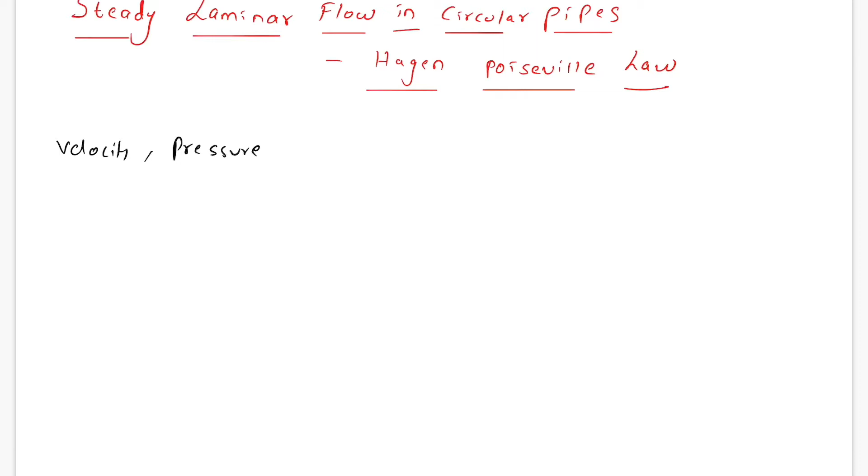Now we'll be dealing with the next topic in your syllabus, the Hagen-Poiseuille equation. This is probably the most important topic in this unit - steady laminar flow in circular pipes, also called Hagen-Poiseuille law. We deal with deriving the relations for velocity and pressure difference for flow. Both these relations will be dealt with here.

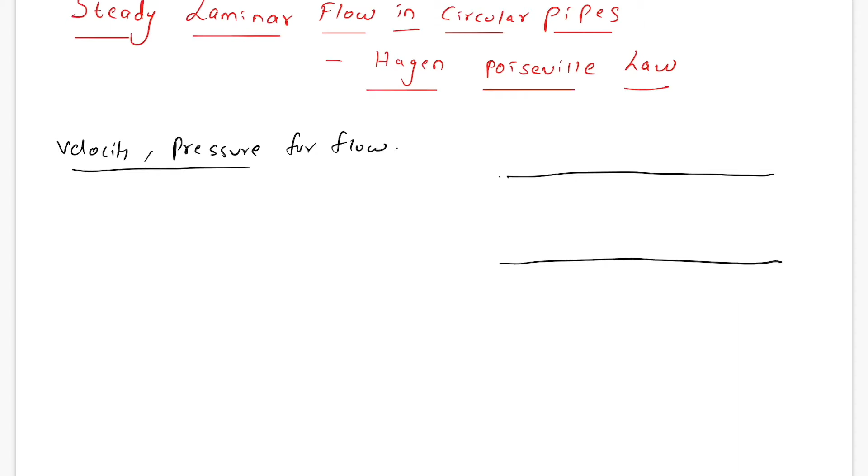Now let us consider a pipe of certain diameter d. In this pipe, let us consider 2 points, point number 1 and point number 2. These 2 points will be on the same horizontal line. There will be flow inside the pipe, and the average velocity of the pipe will be taken as V.

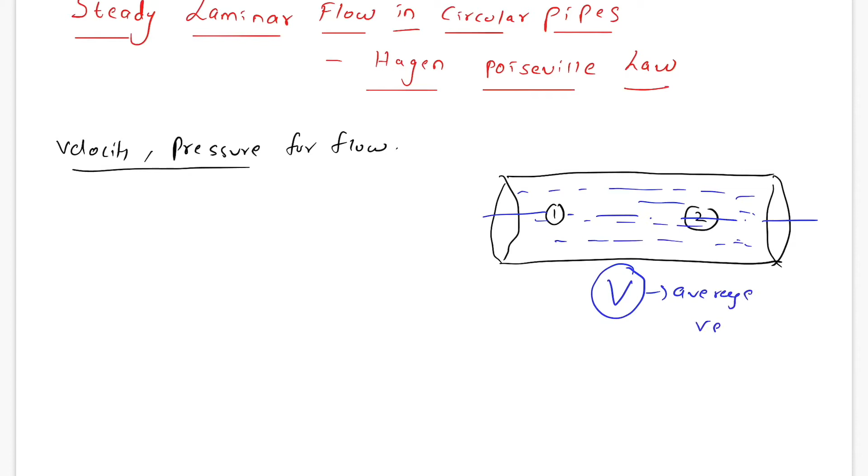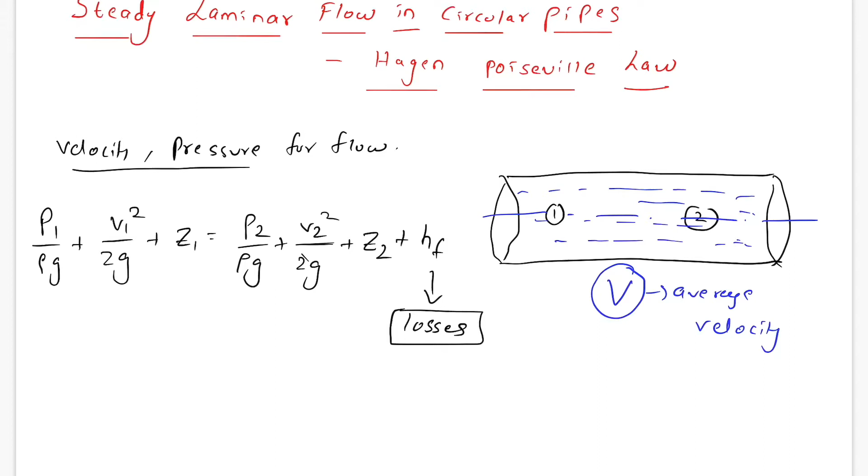Now the next thing we'll do is apply Bernoulli's equation to this particular pipe flow. Considering these 2 points, it will become P1 by rho g plus V1 square by 2g plus Z1 equals P2 by rho g plus V2 square by 2g plus Z2 plus HF. Why HF? Because there are losses inside the pipe - that is what this whole unit is about. We are considering losses, but laminar losses, not higher losses like turbulent flow.

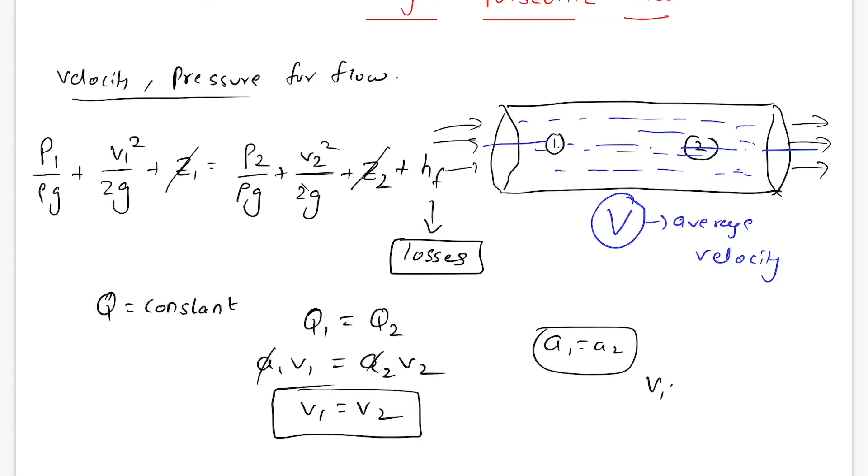Since these points are on the same horizontal line, Z1 and Z2 are the same, so they get cancelled. Also, discharge through the pipe is constant since there's no change in area - whatever flow comes in here comes out there. So Q is constant, meaning discharge at point 1 equals discharge at point 2: A1V1 equals A2V2. Since there's no change in area between point 1 and point 2, A1 equals A2, so A1 A2 cancel and V1 equals V2 - the velocity is the same at both points. We'll take V1 equals V2 equals V.

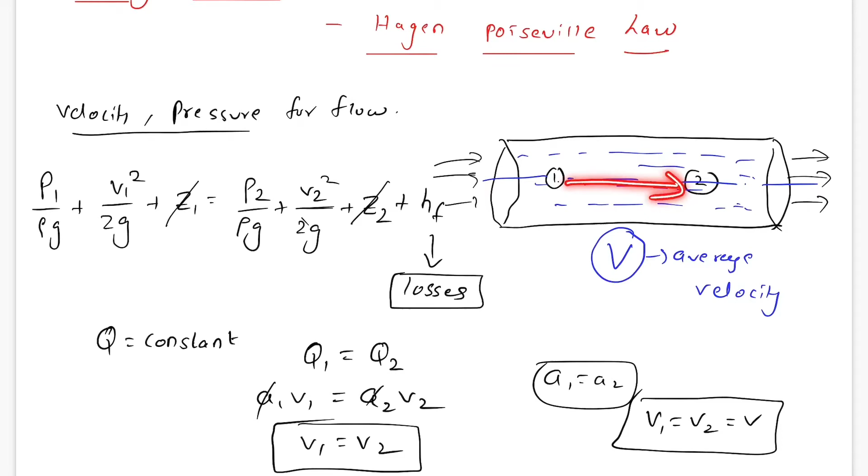Why do we take V1 equals V2 equals V? To simplify the calculation process, since we're considering 2 points, if both are constant, why not take a singular value? So in Bernoulli's equation, V1 equals V2 cuts off, and it becomes: P1 minus P2 by rho g equals HF. That is, the head loss equals the change in pressure, or decrease in pressure, divided by the specific weight of the fluid. We've already seen this equation earlier - we're just reiterating it.

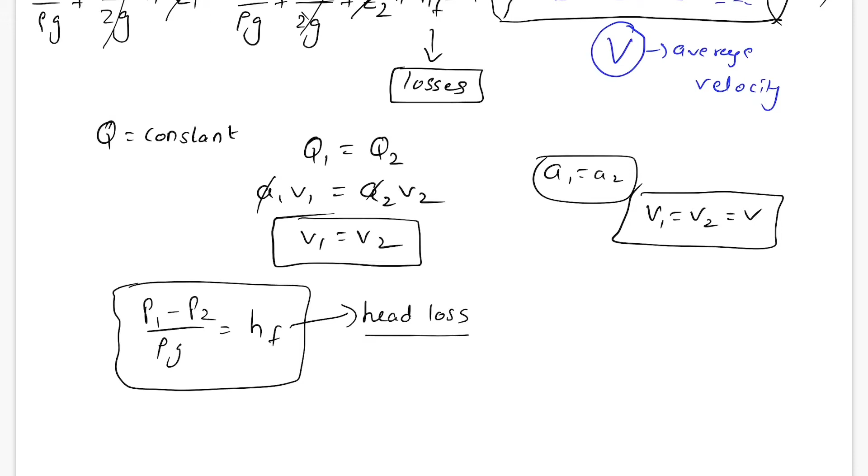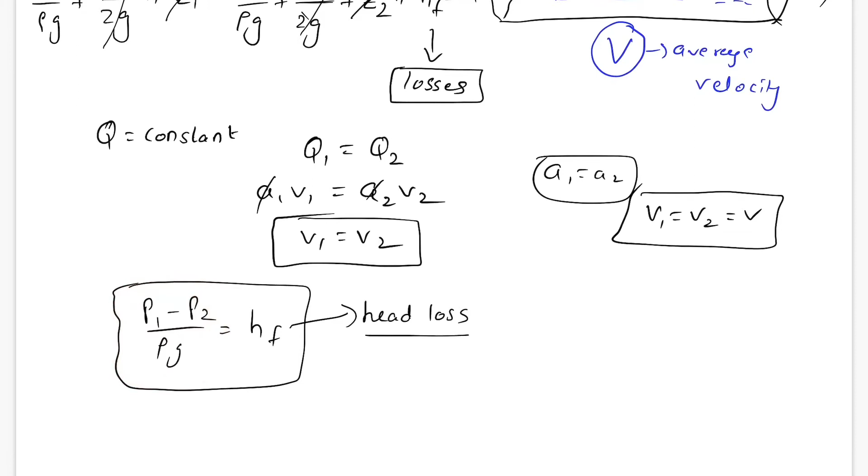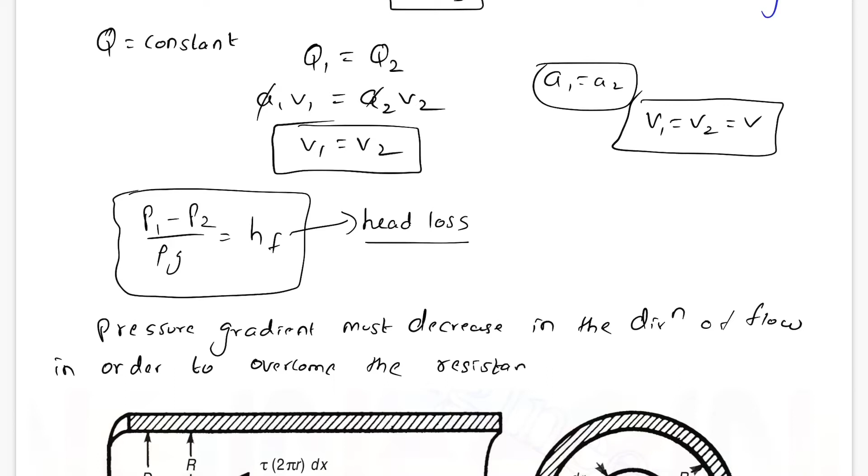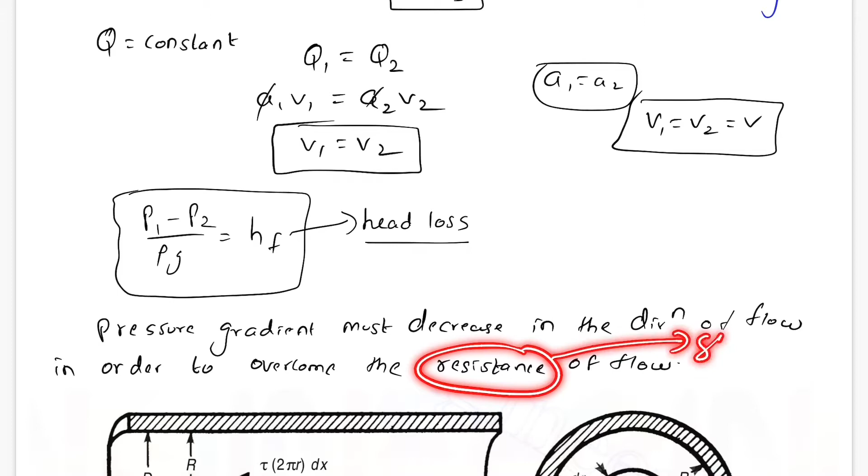This also means the pressure gradient, P1 minus P2 by rho g, must decrease in the direction of the flow in order to overcome the resistance of flow. Which offers this resistance? Shear stress - that is, resistance here means shear stress.

Now in deriving the equation, we'll take a pipe and consider a cylindrical element, because a pipe in 3D is actually a cylinder. If we consider the pipe as a small element, this is a cylindrical element - this is the side view. The element we are considering has a radius small r, while the total radius of the pipe is capital R. Small r is the distance of the element from the center, and capital R is the radius of the pipe. This dr is the thickness of the element we are considering - similar to this thickness here.

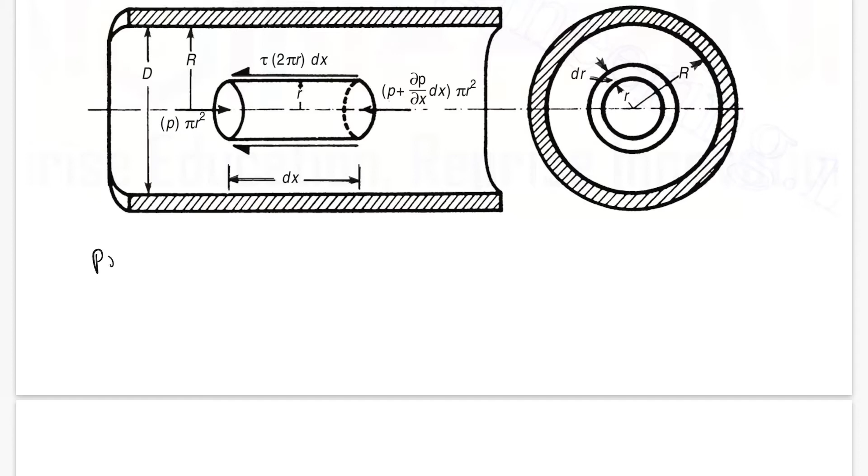Now, we've already seen how pressure and shear forces are related to each other - how shear stress in the vertical direction relates to pressure in the horizontal direction. If we consider this particular element, what are the forces acting on it? One is pressure force from this side, the second is shear stress, and another is pressure force from the other side. These are the total forces acting on this particular element.

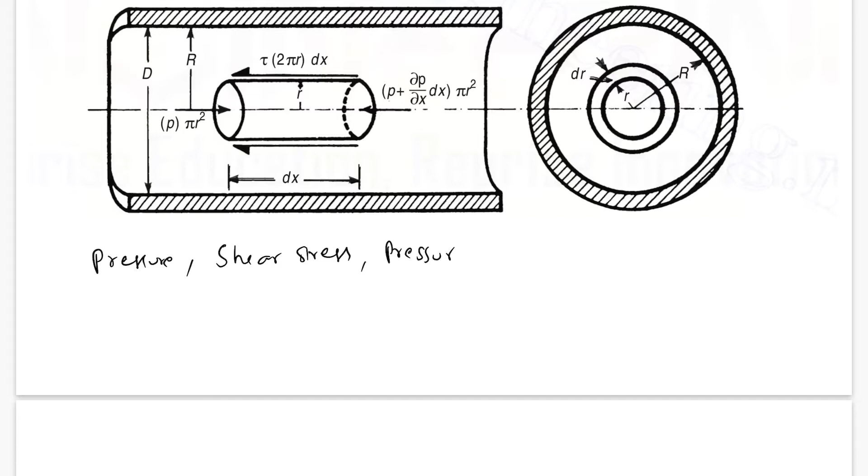What is this dx? Dx is the length of the element. Here dx is synonymous to length of the cylinder. If we take length of the cylinder as L, then length of this particular element is dx.

Now let's go into the next one. We know here shear stress is the only resistance offered to the flow. There is no resistance from outside. Only shear stress is the resistance being offered. What overcomes this resistance? Pressure forces. Pressure force overcomes the resistance given by the shear stress.

Now what happens? The summation of these forces in horizontal direction is 0. Why is it 0? Because there are no external forces acting, only pressure and shear stress are acting. Pressure decrease is equal to shear stress increase, right? Since only pressure is used to overcome shear stress, it means how much ever decrease is there in pressure is equal to the increase in the shear stress.

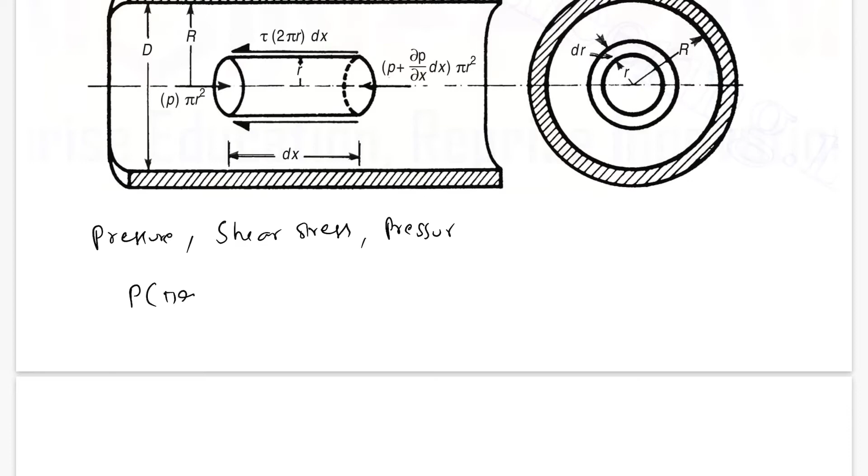That is, let us take in the horizontal direction. In horizontal direction, what is this? This is left side, P into pi r square. Why pi r square? Pi r square is the area, we are dealing with forces here. P into pi r square minus, what is next here? P plus dou p by dou x into dx into again pi r square.

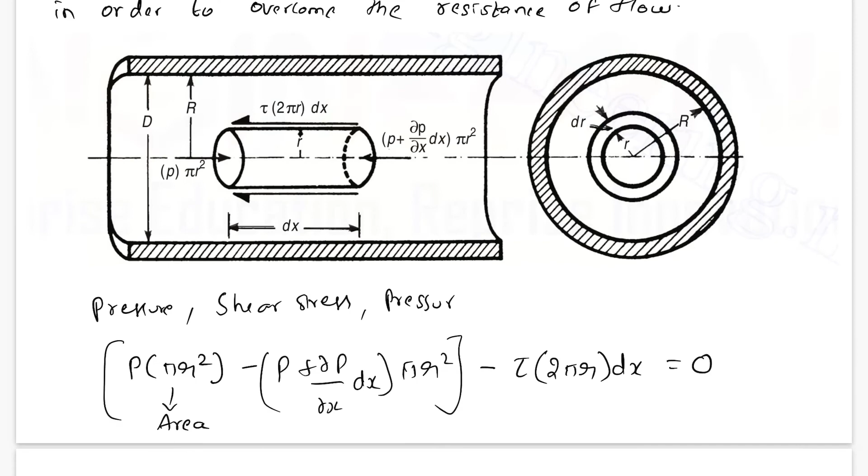This is the pressure forces, and minus tau into 2 pi r dx. Why tau into 2 pi r dx? See, pressure force acts along the cross sectional area. This is a circle with radius r. Pressure acts like this, whereas shear stress acts in the tangential direction. Tangential means circumferential area. What is the circumference of the circle? 2 pi r. Since the circumference is 2 pi r, and since it is acting over length of dx, the total area will be 2 pi r into dx. That is the area over which shear stress acts.

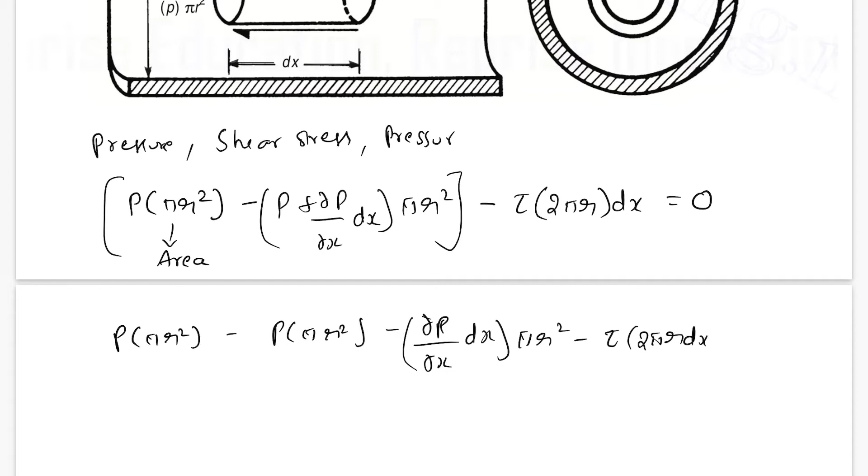Now we'll solve this. P into pi r square minus P into pi r square minus dou p by dou x into dx into pi r square minus tau into 2 pi r dx is equals to 0. So this one goes. Now minus dou p by dou x into dx into pi r square is equals to tau into 2 pi r into dx, R pi dx.

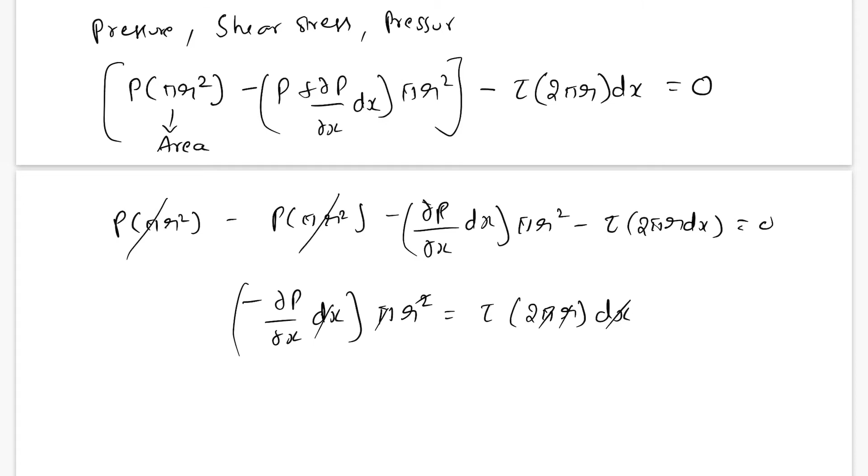From this what we get? Minus dou p by dou x into r is equals to 2 tau, which means tau is equals to minus dou p by dou x into small r by 2.

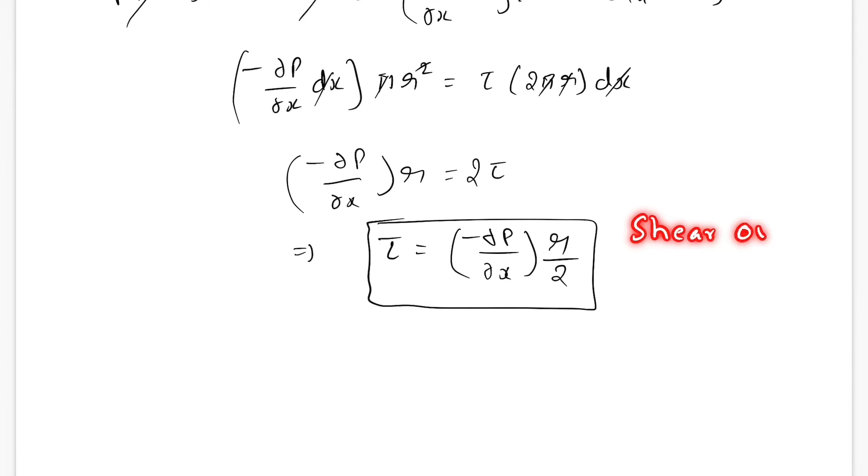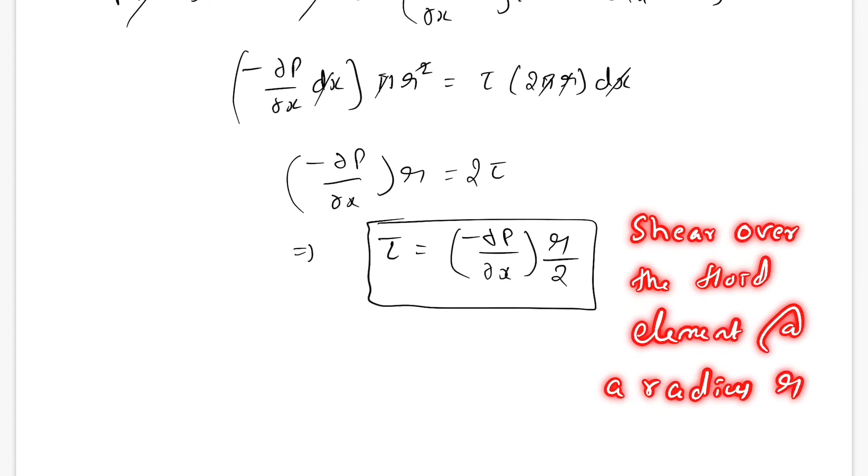This equation is shear stress over the fluid element at a radius small r. That is, if we take an element which is at a radius of say r, some value, it can be 1 meter, 2 meter, 3 meter, whatever is inside the pipe, then the shear stress will be given by this expression, which means tau here is directly proportional to small r, which means the more the distance of the particular point from center is, the more the shear stress will be at that particular point.

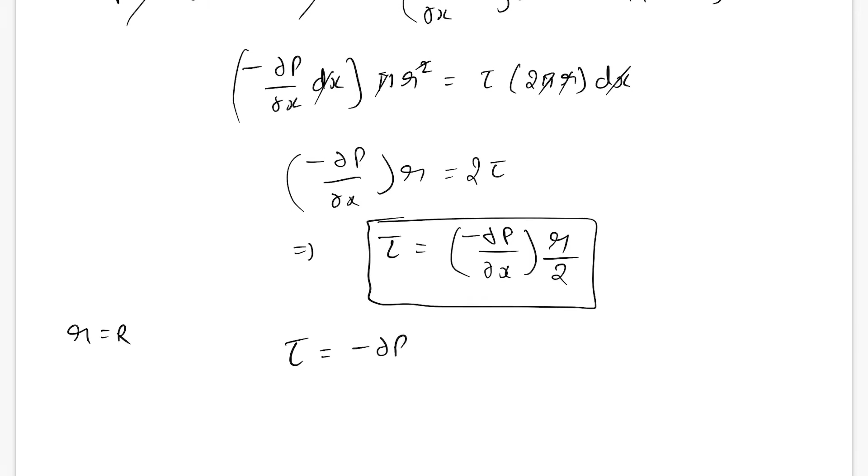Now, if we are considering a fluid element at the pipe wall, that is where small r is equal to capital R, the radius of the pipe, that is at the wall, radius will be capital R. So what will happen? Tau is equals to minus dou p by dou x into capital R by 2. This is tau naught, that is shear stress at wall.

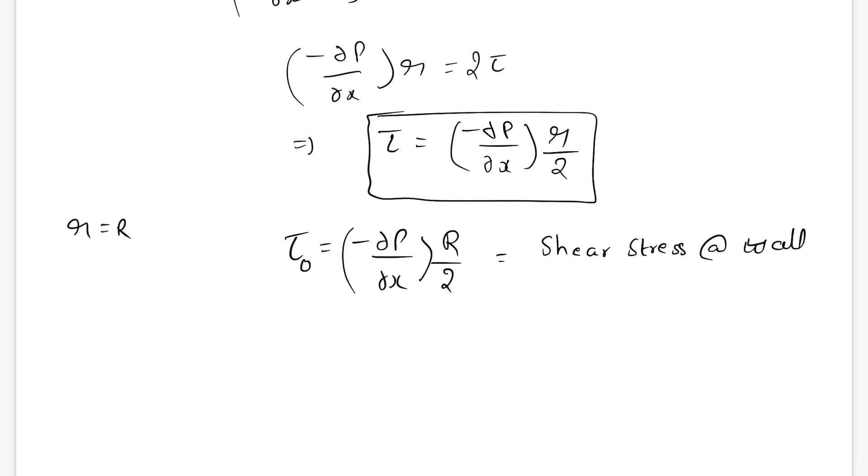Now, what will happen if we consider at the center of the pipe? What is the radius at the center of pipe? If we consider an element at the center of pipe, the distance from the center is 0, that is small r is equal to 0 at center. So tau at center is equal to minus dou p by dou x into 0. That is what we got. Tau at center is equal to 0.

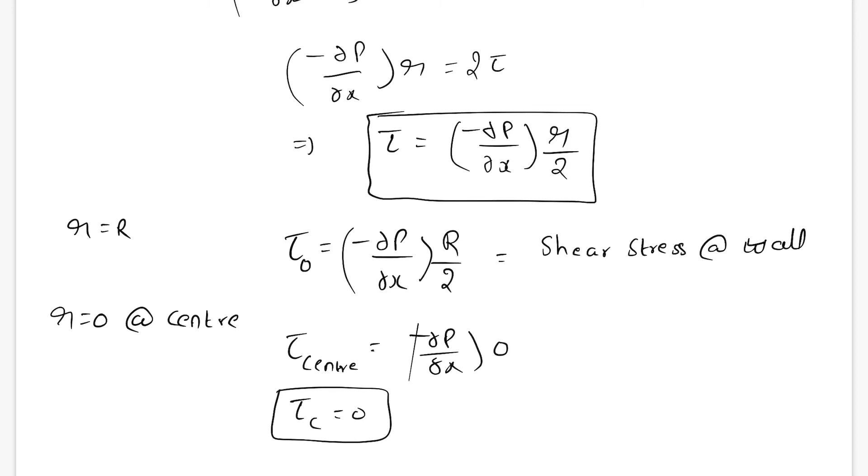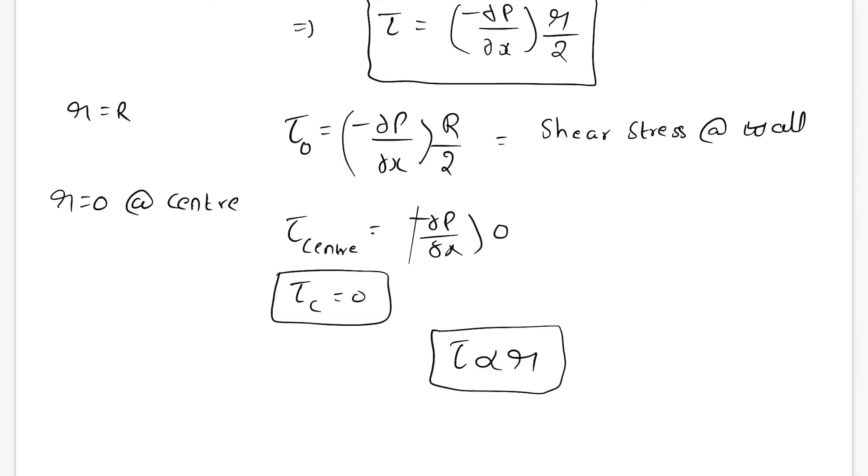We already discussed this, but now this expression proves that what we discussed and what we derived is correct. In this expression we see tau is directly proportional to r. If change of pressure with respect to length is constant, then tau is proportional to r, which means the relationship of shear stress is linear, which means as r increases, tau increases.

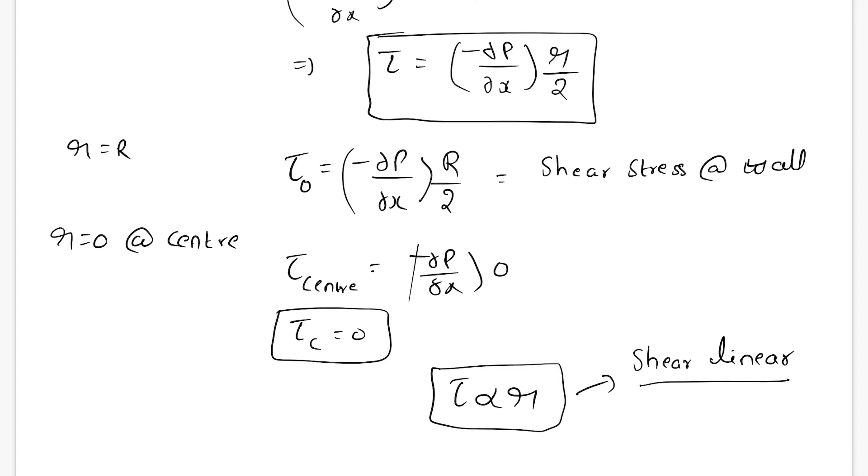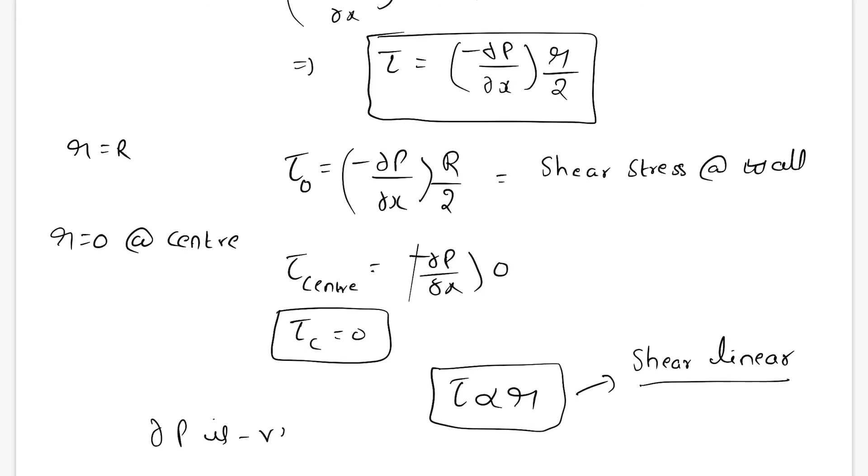Since we've proved that shear stress is linear with respect to the radius, let's see why there is a minus sign here. We know shear stress is positive because shear stress increases, so whatever value we get should also be positive. But as we go along the length of the pipe, pressure decreases, because that is the only thing that compensates for the shear stress increase. Pressure decreases means dou p is negative, change in pressure is negative, which means minus dou p by dou x is positive. Pressure decreasing along the length of the pipe is already negative, so minus into minus is plus, which means tau is positive, shear stress is positive, and change in pressure is negative.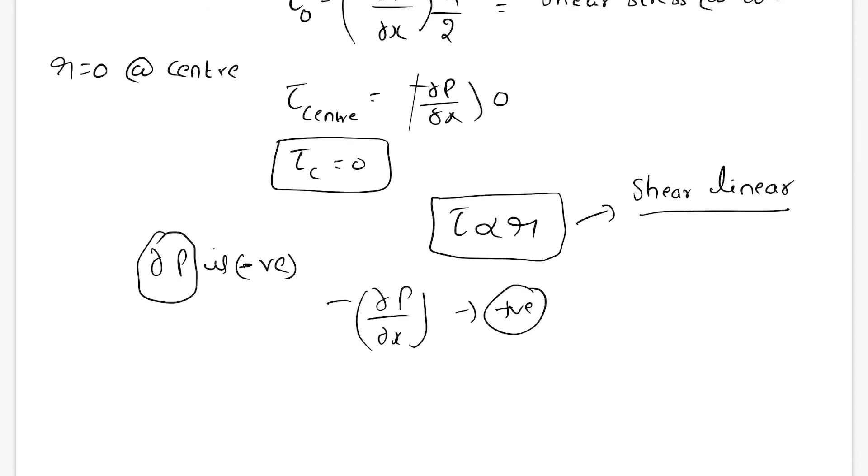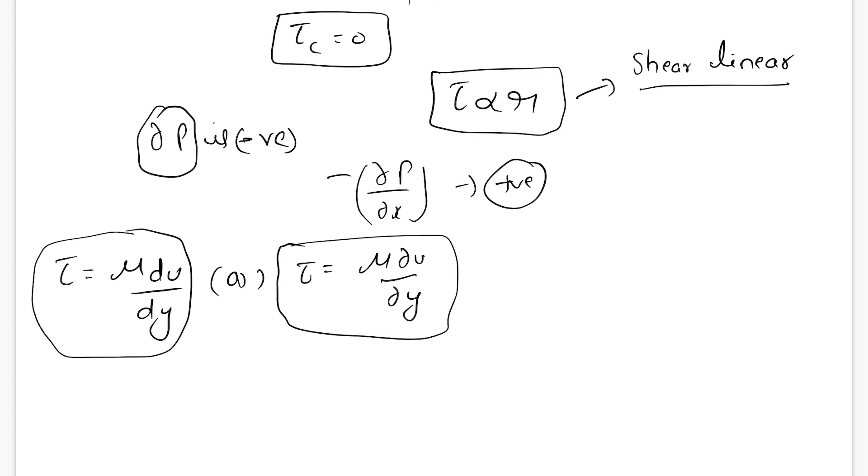Now let's see another equation we can derive from this relation. What is the expression for tau that we already know? Tau equals mu du by dy, or tau equals mu dou u by dou y. Dou here is used because dou is partial differentiation, while d is absolute differentiation. Dou u by dou y means partial differentiation with respect to the y direction.

Since our velocity varies only with this length, that's what we are considering. Shear stress varies only with the y direction, so we'll consider only differentiation with respect to y. The same follows for pressure: since pressure only changes in the x direction, our pressure term will be dou p by dou x only, not dp by dx or dp by dy. So now from this we'll know.

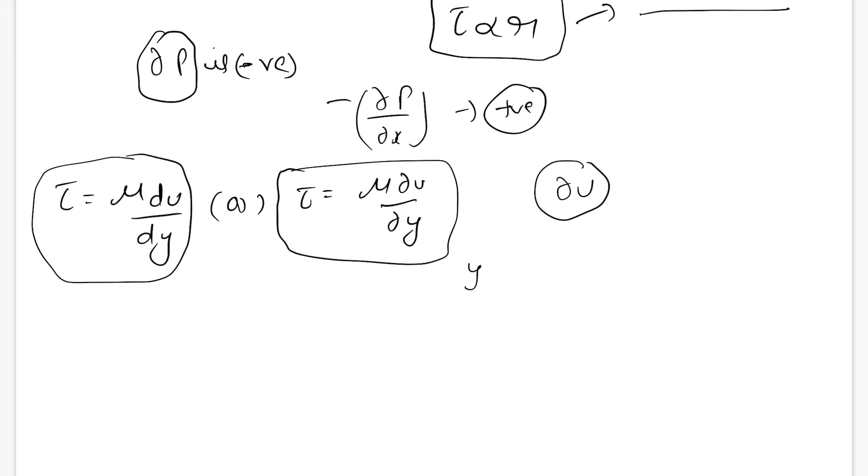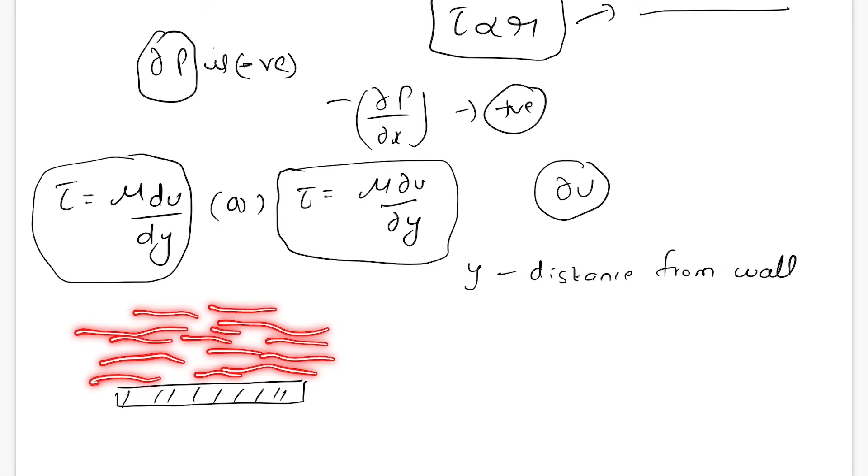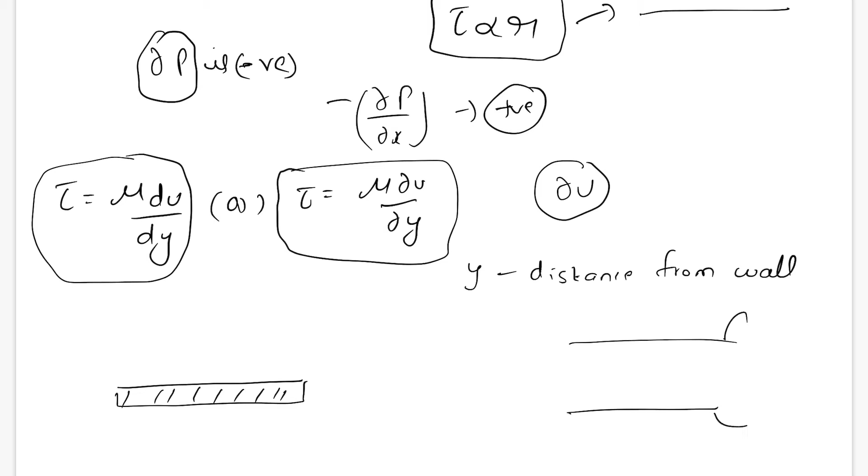Dou u remains the same. Y is the distance from the wall. Say if you take a plate like this, and flow happens over it like this, then to calculate shear stress at a particular point, we take y as the distance from the plate. In our pipe flow, however, walls are at both directions, both are walls, which means here y can be written as capital R minus small r, where capital R is the radius and small r is the distance from the center.

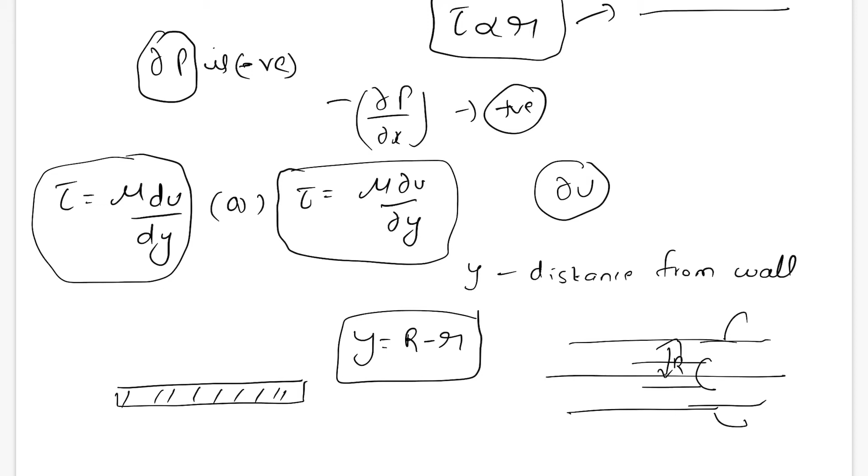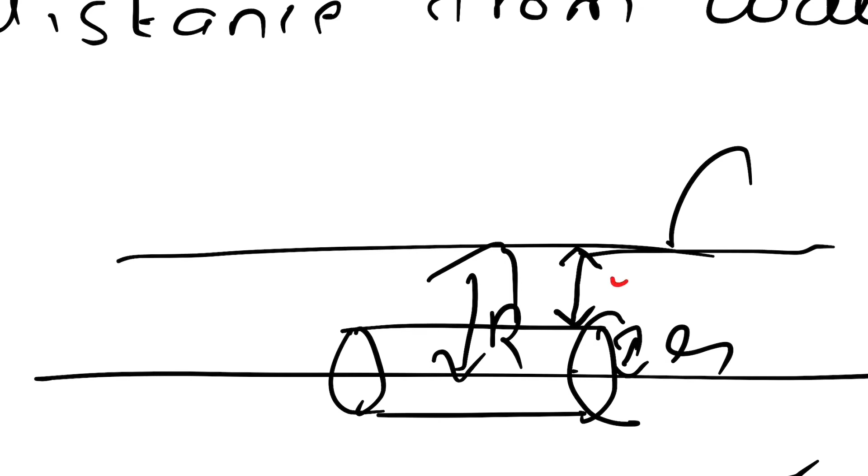If we take an element like this, this is small r, and this is capital R. From the wall, this is the distance y. Let me write it in another color: the distance is y. So what can be seen from here is that y equals capital R minus small r.

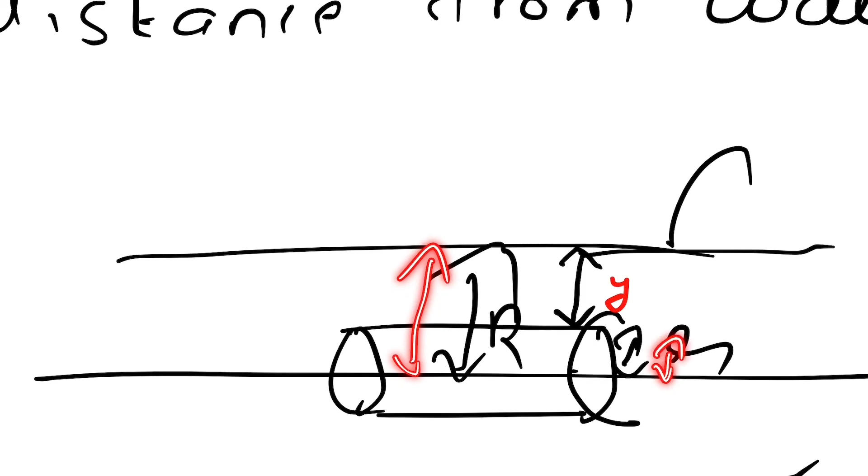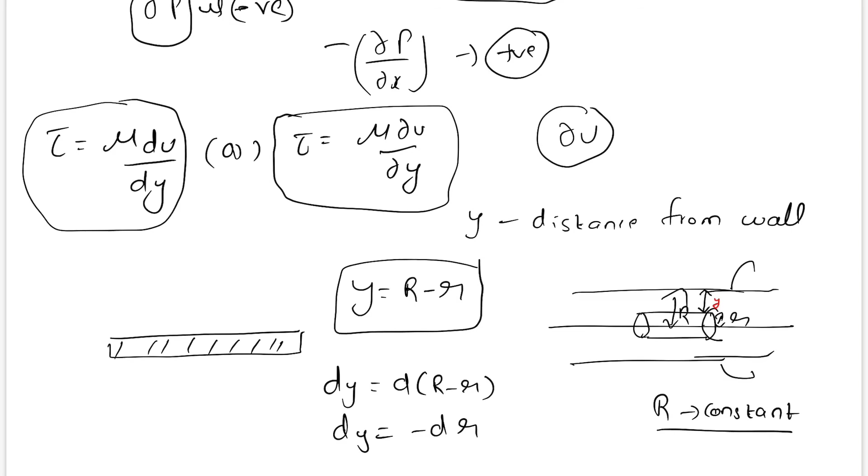Now, from here we know what y is. What will be dy? Dy is d of (R minus r), that is dy equals minus dr. Why? Because R is a constant value, the radius of the pipe is fixed, and the derivative of a constant is zero, whereas small r is a variable value.

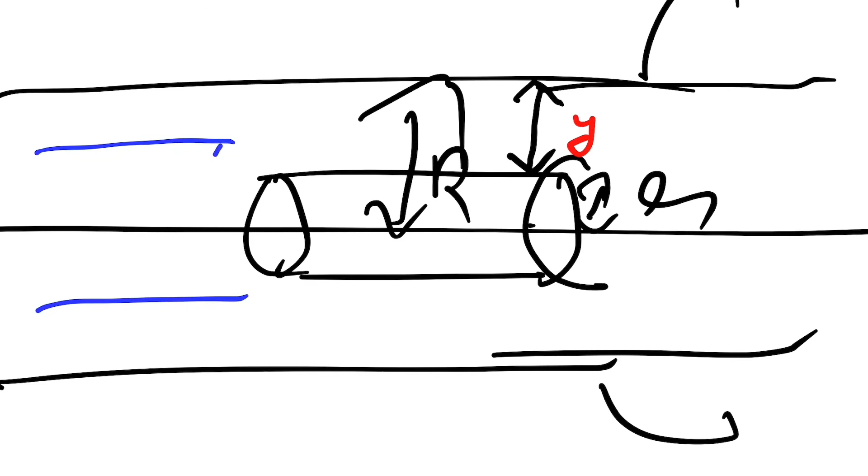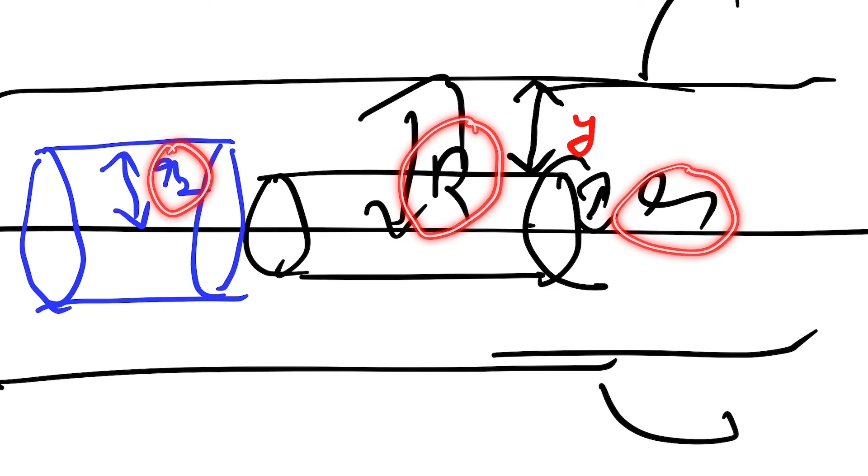If we take this small element here, and then take another element further along, that radius will be say r2, something different. But no matter what, the capital R value won't change, while this small r value will keep on changing, that is the way we assume it, wherever we assume it, it changes. So now dy equals minus dr.

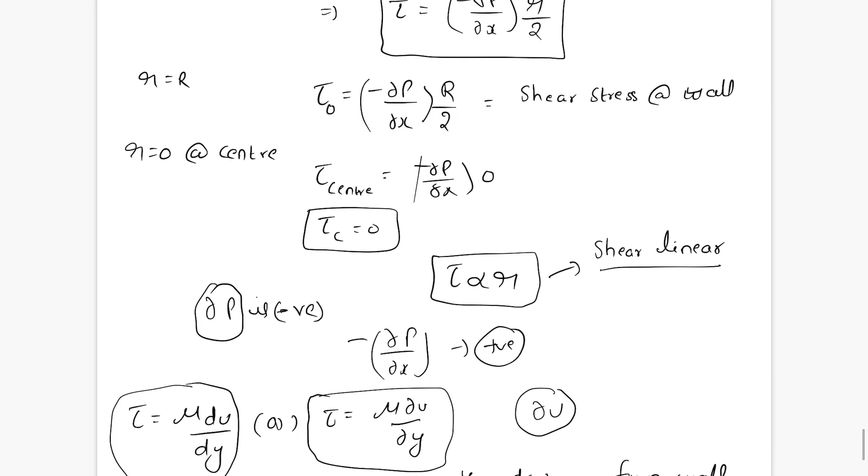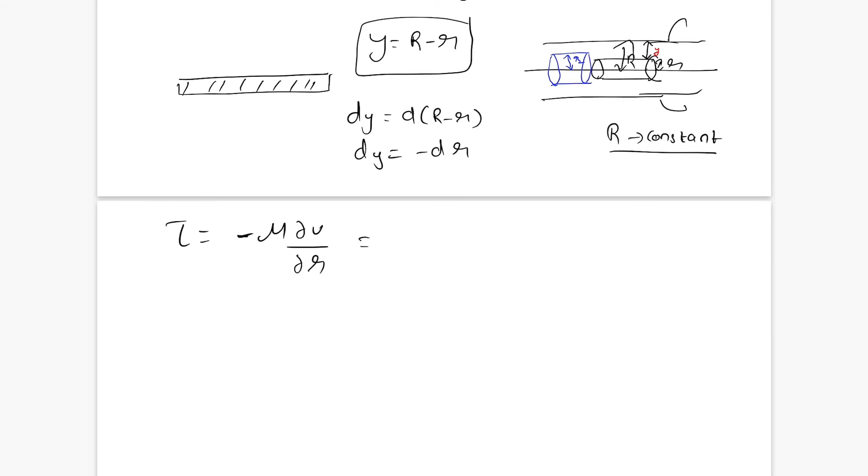We'll use this in the tau equation. Tau equals minus mu dou u by dou r, with the minus already taken into account. What did we get for the expression of tau earlier? Tau equals minus dou p by dou x into small r by 2. Using that here: minus mu dou u by dou r equals minus dou p by dou x into small r by 2. The minus minus cancels, and we rearrange the terms to get dou p by dou x equals 2 mu by r into dou u by dou r.

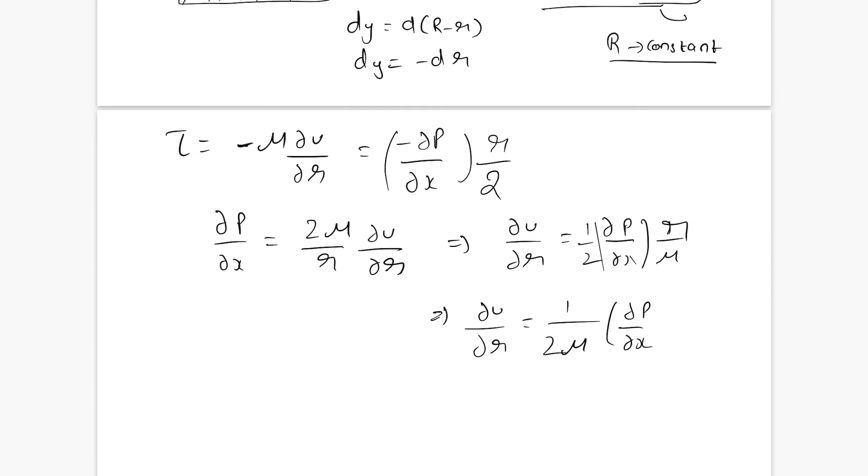From here again, dou u by dou r equals 1 by 2 times dou p by dou x into 1 by mu, times r, which means dou u by dou r equals 1 by 2 mu into dou p by dou x into small r.

The next step is to find u. Here we have dou u by dou r, which is the change in velocity with respect to radius. That is what this expression means. Now in order to get u, we have to integrate.

We integrate. While integrating, we see dou u can be written as 1 by 2 mu into dou p by dou x into r dou r. The r dou r term we can easily integrate, but dou p by dou x is also there. We don't know if it is a constant value or a value that depends on r. If it depends on r, then the formula will change.

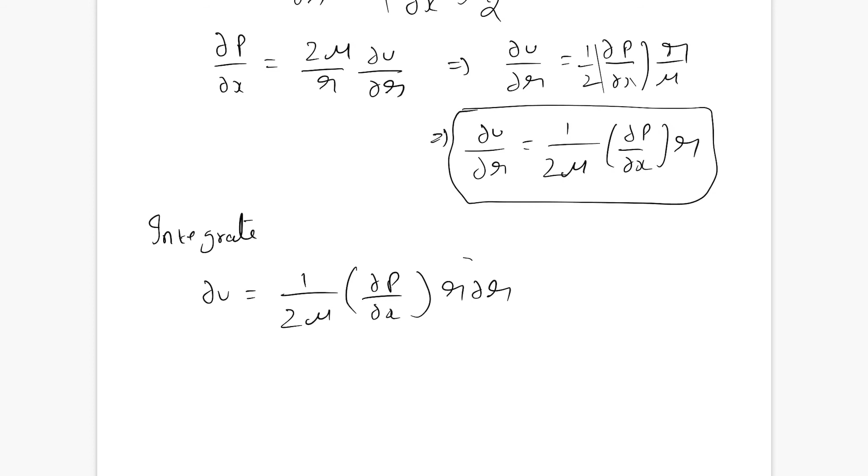We have u v, derivative of u into v, that is u dv plus v du kind of. But in earlier equations, what we derived is pressure changes only with respect to length, that is in the horizontal direction. In the vertical direction, pressure is constant, which means vertical direction here is radial.

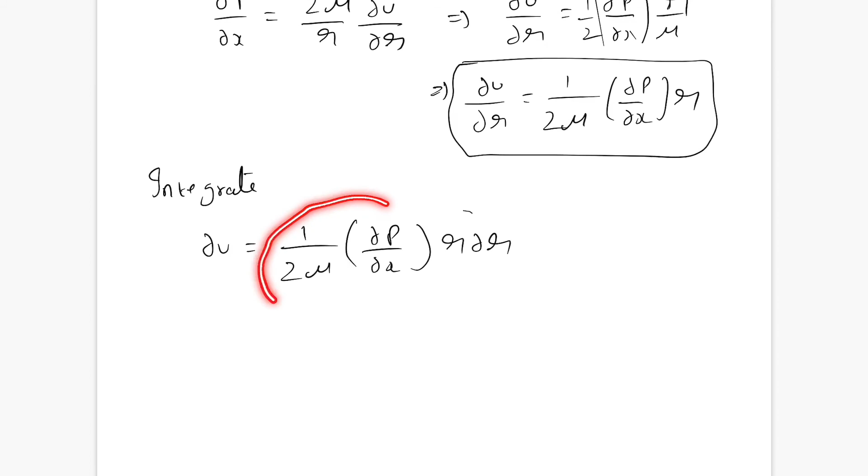Radial is also vertical direction only. Like this is the pipe, and this radius is also the vertical direction. So dou p by dou x is constant with respect to r. This value can be termed as a constant value, that is, this is a constant.

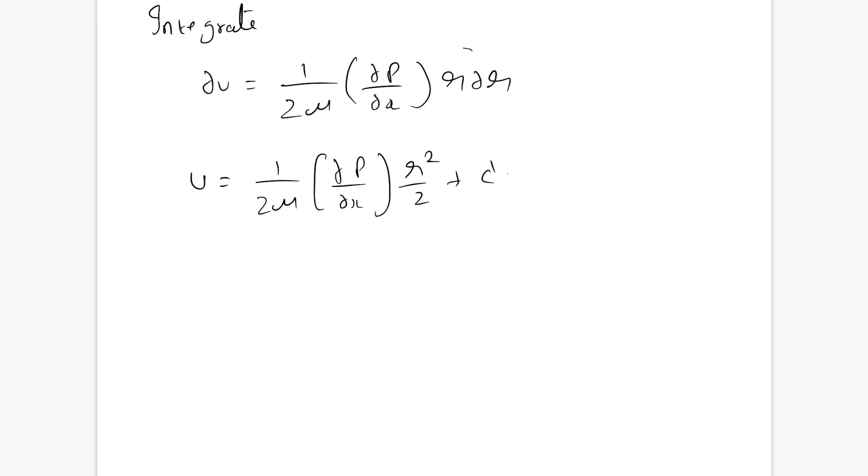Why will it be useful in deriving all this? So we integrate u. The integration of dou u is u equals 1 by 2 mu into dou p by dou x into r dr, or dou r. What will happen to it? R square by 2 plus c. What is c? An integration constant. We don't know what it is, but it is a constant.

In order to find c, we'll apply the boundary conditions. What are the boundary conditions at the wall? That is, at small r equals capital R, what is the velocity? Velocity is 0.

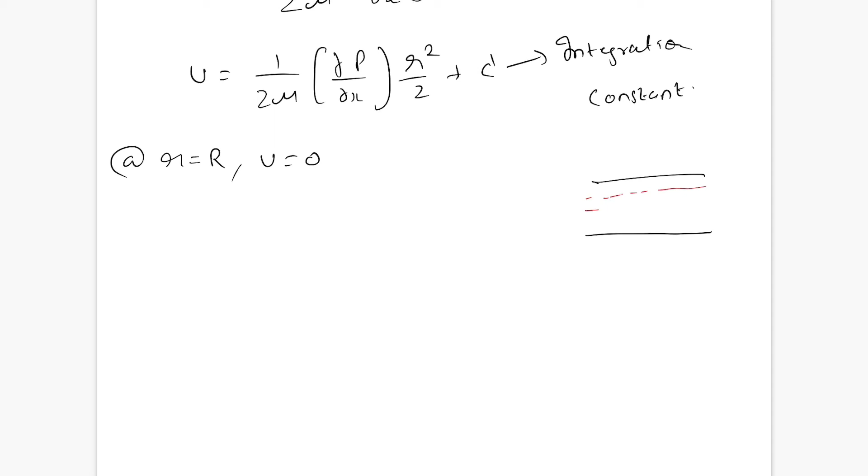Because why? See, here there is the pipe, flow is happening. Here one fluid layer will exert some pressure or resistance over another fluid. What happens at this point, that is at the boundary point? The velocity of this layer is some, velocity of this layer is some, velocity of this layer is some. What happens at this point? Since velocity of the wall itself is 0, wall is not moving anywhere, which means the velocity of the wall is 0.

What happens is, any fluid layer closely attaching to the wall, we are zooming in so much that we consider that minute layer in contact with the wall. It will almost remain at rest because the wall has higher resistance. The next layer attaching to the wall will also be 0, whereas the next layer which comes after that will have a little bit more velocity. Then there will be another layer with a little bit more velocity. That way velocity increases. That is what profile of velocity means here.

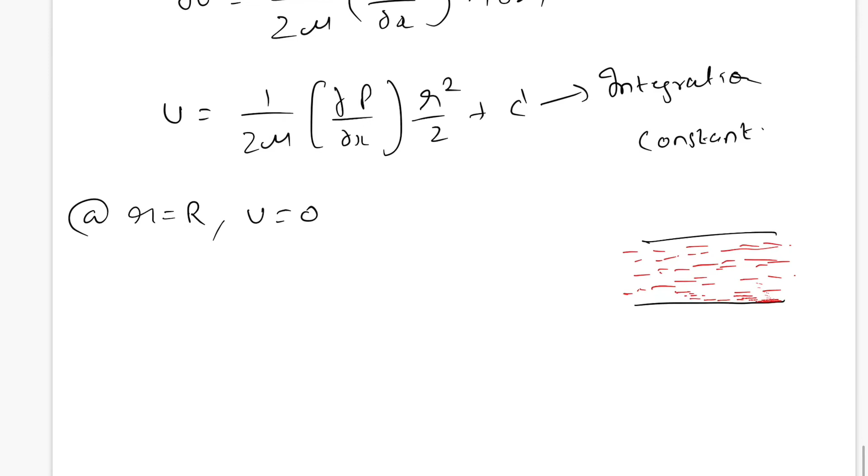Now, at r equals R, velocity is 0. We'll apply this. What will happen? U equals 0 equals 1 by 4 mu into dou p by dou x into R square plus c. Since this is 0, what is c? It is minus 1 by 4 mu into dou p by dou x into capital R square.

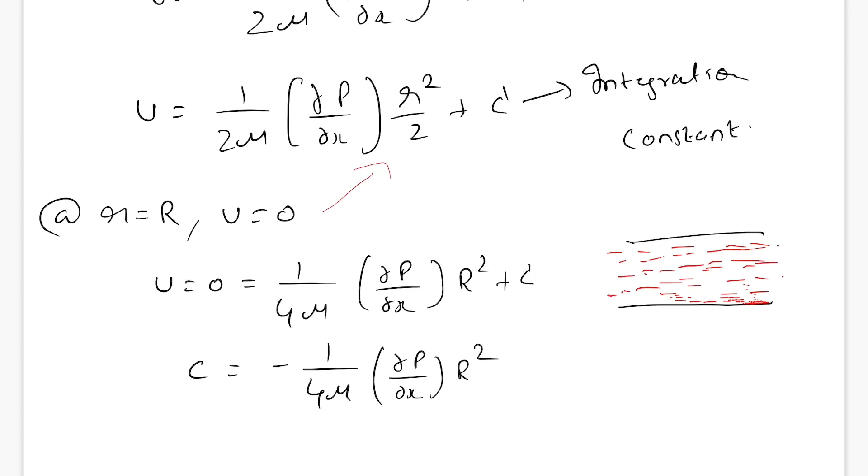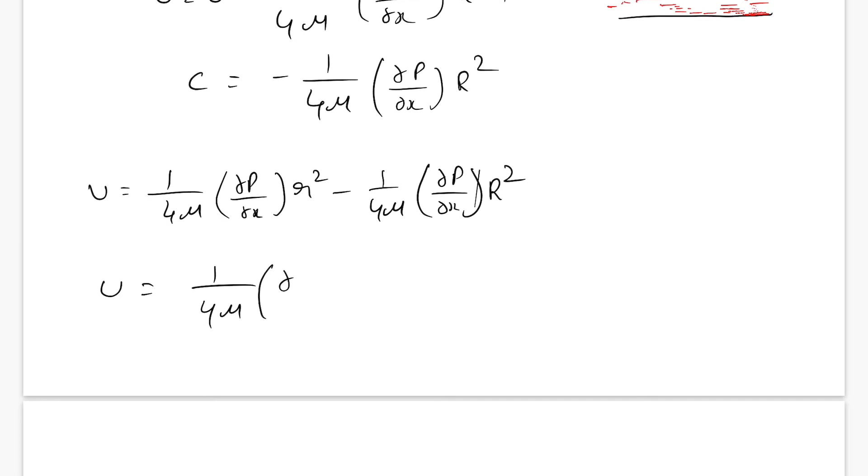This will apply in that equation, which means u equals 1 by 4 mu into dou p by dou x into small r square minus 1 by 4 mu into dou p by dou x into capital R square. This is c, the integration constant we are getting. Now we'll take out the common terms: 1 by 4 mu into dou p by dou x into small r square minus capital R square. We can write this as u equals minus 1 by 4 mu into dou p by dou x into capital R square minus small r square.

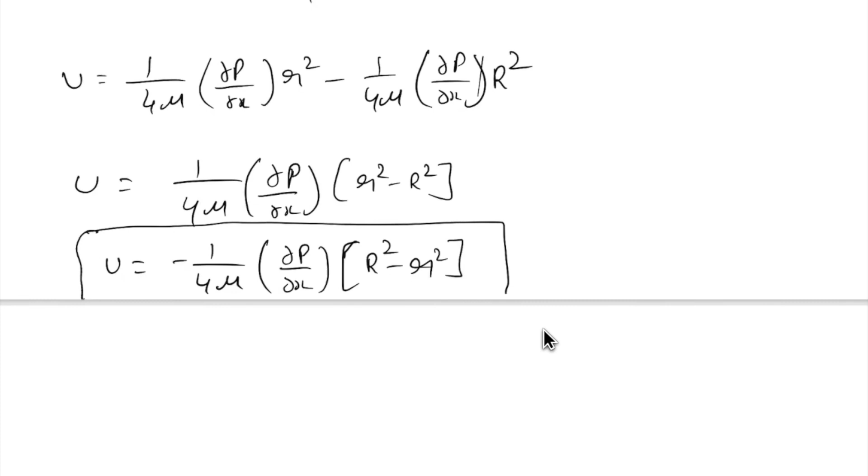This is the expression for velocity in a steady laminar flow through a circular pipe. This expression is quite an important one. It shows how velocity varies with respect to the pressure gradient and radius inside the pipe. Now this is just the first part. We thought about deriving the equations for velocity and pressure. This is just the equation for velocity. The equation for pressure and the equation for discharge we'll be seeing in the next part.

So we'll see how they are derived and what their significance is in the next part. Thank you.